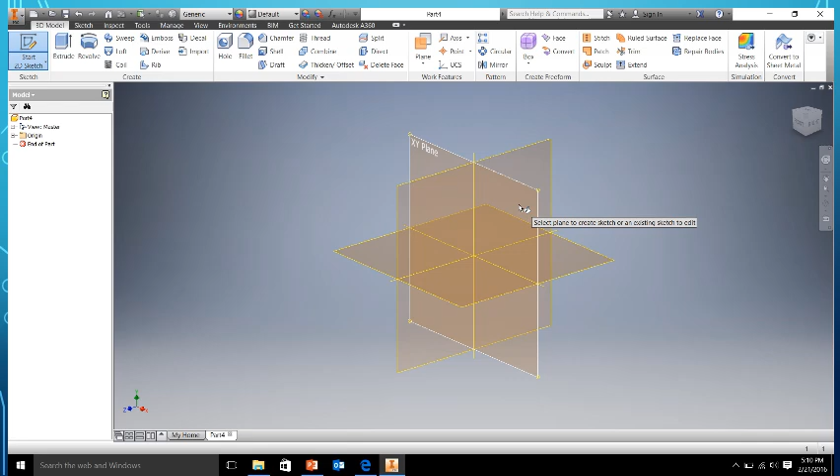First off, I'm going to go to Inventor, open a new part, start a new 2D sketch, go to Plane XY. I'm going to select the rectangle command. What we're going to do, we're going to make this rectangle 2 inches wide by 3.25 inches tall. Hit enter. I'll zoom out so you can see it. So our height is 3¼ inches tall. Our width is 2 inches.

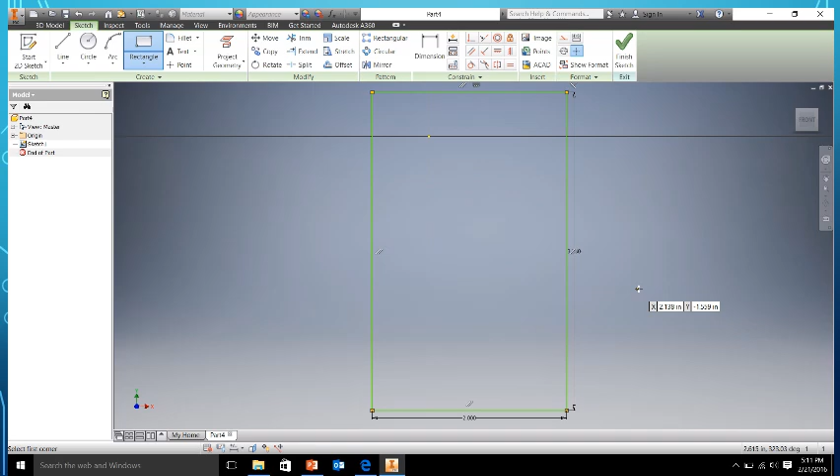This is going to give us the profile of the block, and we are using the subtraction method. I'm going to extrude this part. We're going to extrude this part to 1.5 inches. So 1.5 inches we extruded this block.

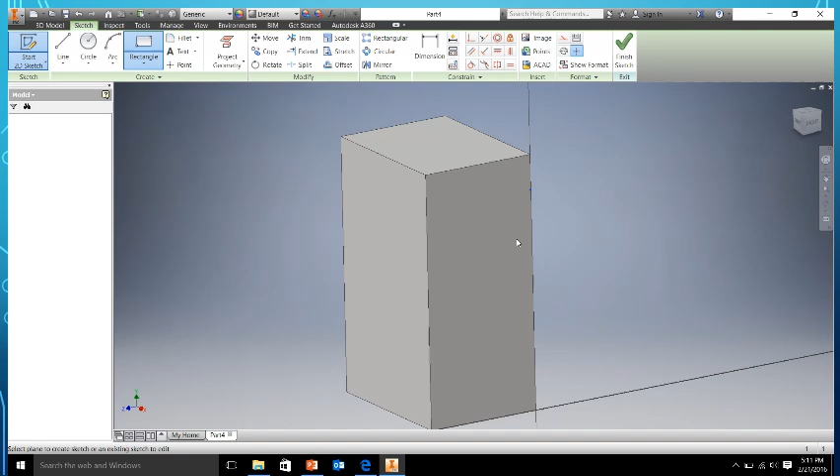Our next step, we're going to start a sketch on the right face, so the thinner face of our cube. I am now going to select the rectangle command, start up in the far left corner, make sure that little green dot shows up, or the bigger black dot. And what we're going to do is we're going to subtract this material.

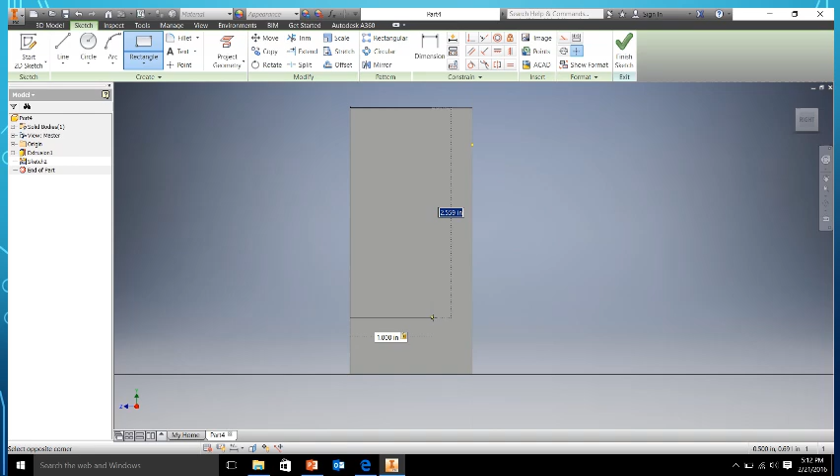So we're going to subtract 1 inch, so make your width 1, and our height is going to be, we're just going to type in 3.25, not divided by, subtract 0.5. That's going to give us our height of 2.75 and our width of 1 inch.

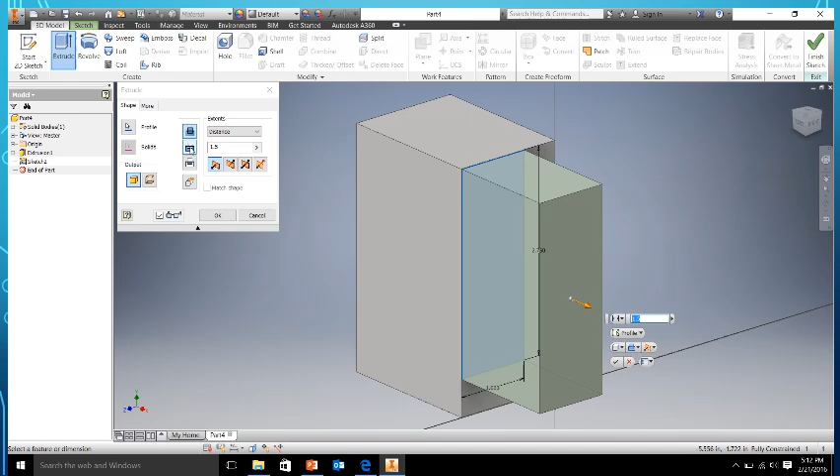The next step, we're going to extrude this block, but we're going to extrude cut. So it's the second option in your vertical commands here under extrude, and instead of distance, we're just going to go through all. So make sure that this whole box is purple and we get all of our material removed. We're going to hit OK.

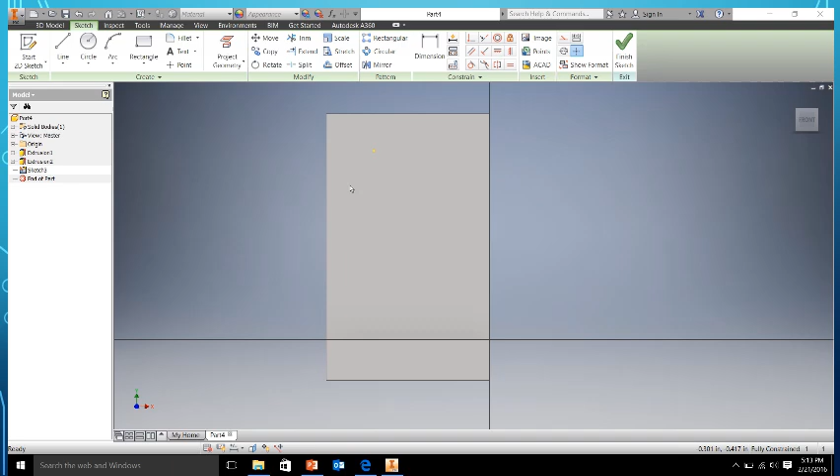Our next step will be to create a 2D sketch on our front face. After we start our new 2D sketch on our front face, what we're going to do is click the rectangle command. We're going to start from the upper left hand corner. Make sure you see that green dot or the larger black one.

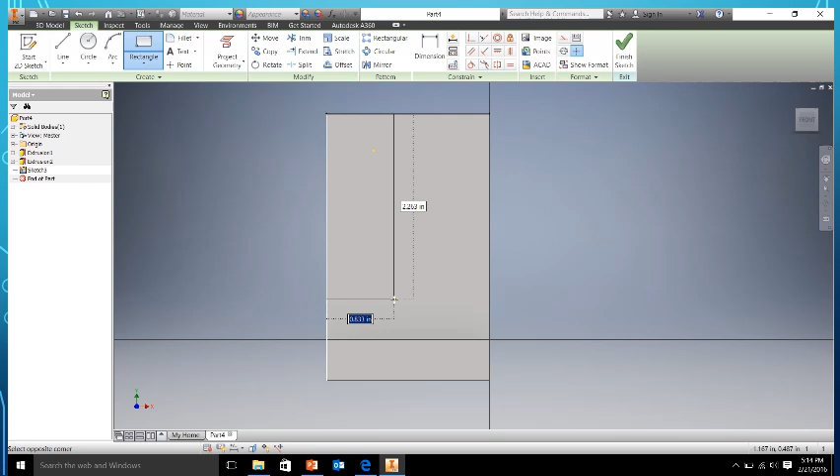What we're going to do is we're going to take off 1/2 inch. So our width at the bottom that's lit up blue, we're going to change that to 0.5. We're going to hit tab. Our height is going to be the 2.75. Go ahead and hit enter.

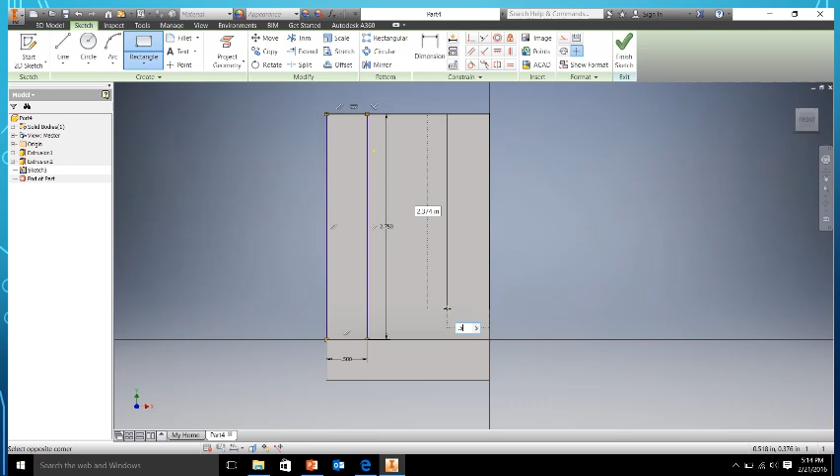Our next step, we're going to stay in the rectangle command and start from our right side. So it's going to be the exact same dimensions. Our width is 0.5, our height is 2.75, and go ahead and hit enter. So you have 2 of these rectangles on the outside.

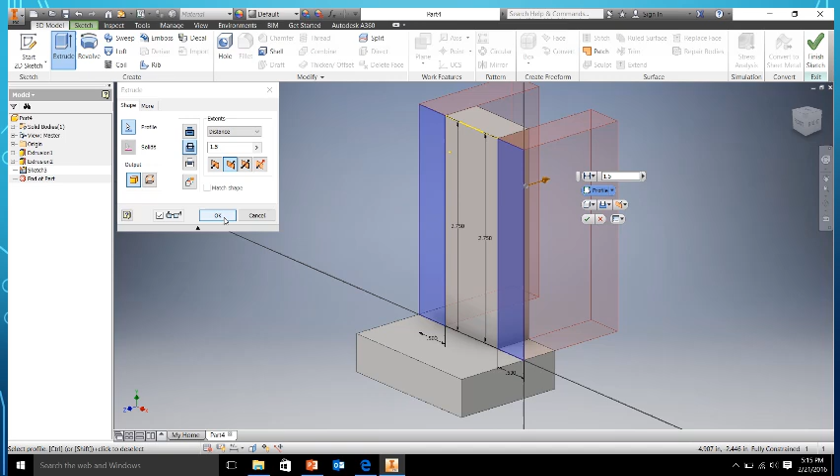Our next step will be to extrude those, but we're going to extrude cut. So make sure you have your cut selected. And what happens is we need to select the profiles. So we're going to go ahead and click those 2 rectangles on the outside. In this case, the distance of 1.5 will get all the way through our part, which is what we want. We'll hit OK.

Our next step, we're going to start a 2D sketch again on our front face of this long rectangle. Okay, our next step after we've created a sketch again on our front face, our long rectangle, we're going to hit construction line under format on the upper right by the finished sketch. We're going to select Project Geometry and click our front face of our long rectangle.

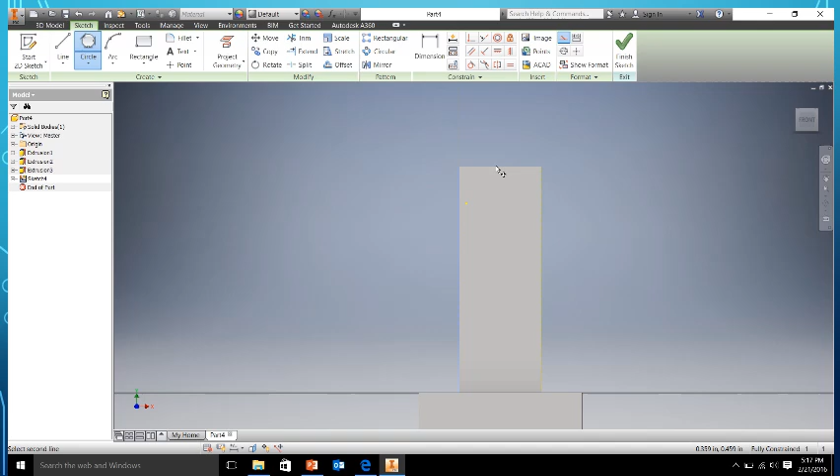Our next step is to take off Construction Line. We're going to go under Circle and hit the little triangle under Circle so we can have more options. We're going to select Tangent to 3 lines. From that, we're going to select our vertical line, our horizontal top line, and our other side vertical line, and it's going to give us a circle in the middle here.

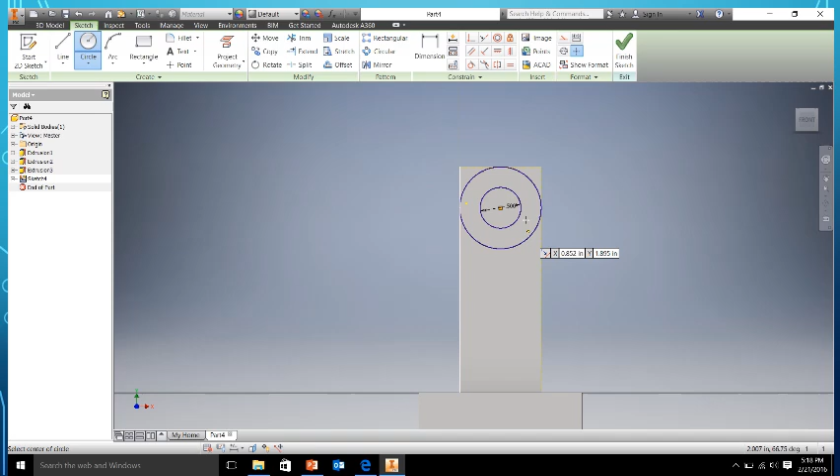After we have this circle, we're going to go back up to our circle command, hit the little triangle, and we're going to go circle center point. So just our normal circle. Click the center point of the circle we've just made, and our second diameter is going to be 0.5. So you see that we have 2 circles on the front face of our long rectangle.

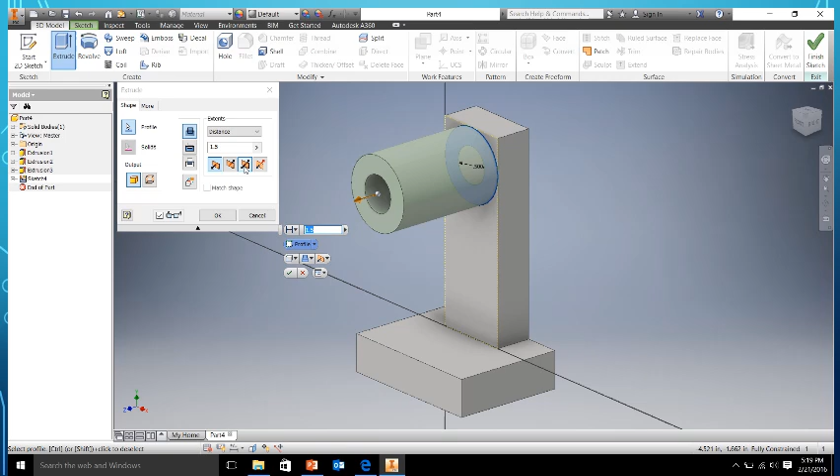Okay, our next step after we've created our second circle, we're going to go up to Extrude, and we're going to extrude in between our larger circle and our 0.5 circle. So notice there's a hole in the middle here. You're going to select your symmetric option. So what that's doing is it's splitting our circle on both sides of this face.

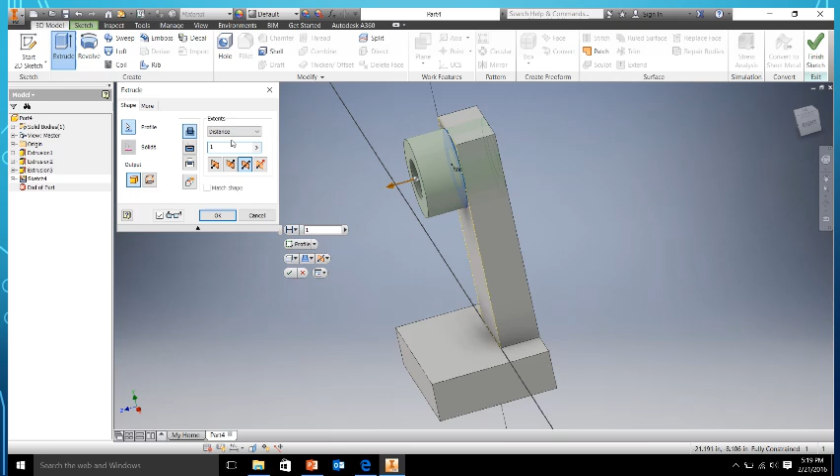And we're going to change our distance, instead of 1.5 inches, we're going to make it 1 inch. And you can hit OK. So, it didn't do much to the back side because obviously there's already a piece of material there, but it did bring it out 1/2 inch, which is what we want.

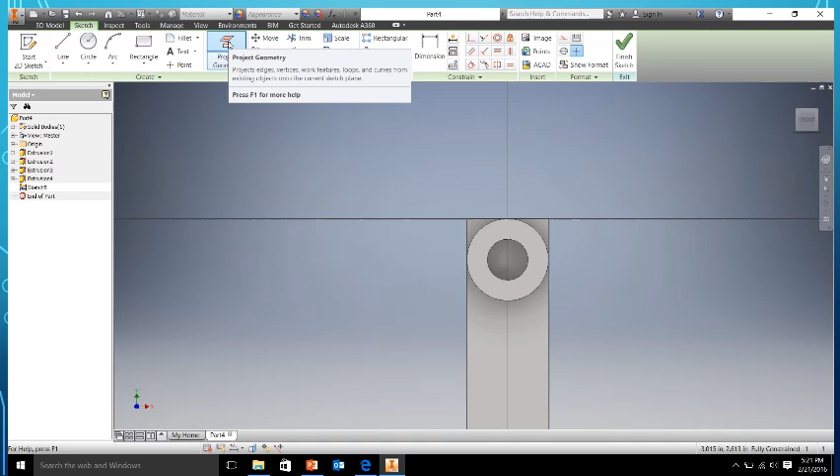Alright, after we've extruded our circle symmetric 1 inch, we're going to start a new sketch, and we're going to click the little triangle piece, if you will, up next to our circles. From that point, you're going to select Project Geometry and grab those 2 triangles on each side of our circle. Once you've done this, you will then go to Extrude, and we're going to cut.

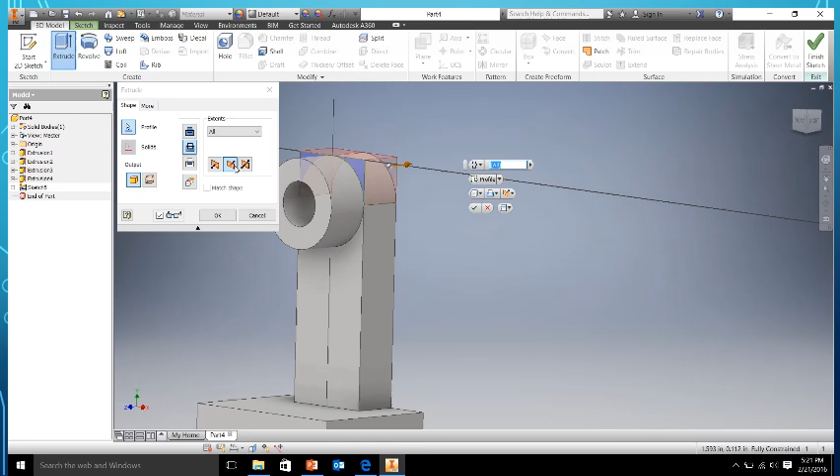And you do need to select your 2 profiles. So we're going to click those 2 corner pieces. And as long as it's all the way through our piece, in this case it's distance, we can also just click all, and it'll just make sure to get around those little pieces. You're going to hit OK. So far we're looking pretty good.

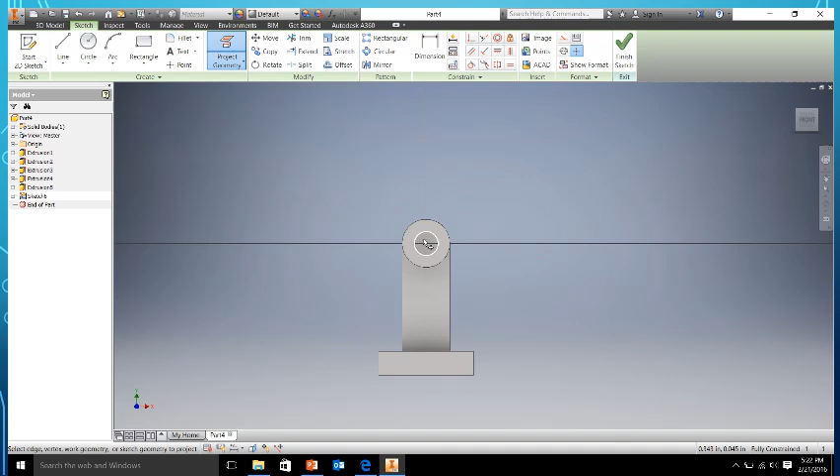What we need to complete, we need to punch out a circle in here. So I'm going to go up to Start Sketch, click the inner circle, we're going to click Project Geometry, select that so it lights up yellow, pink, whatever color you want. We'll go back to Extrude, and instead of extruding out, we're going to cut, change our distance to all, hit OK, and there you go. We have our circle in the middle.

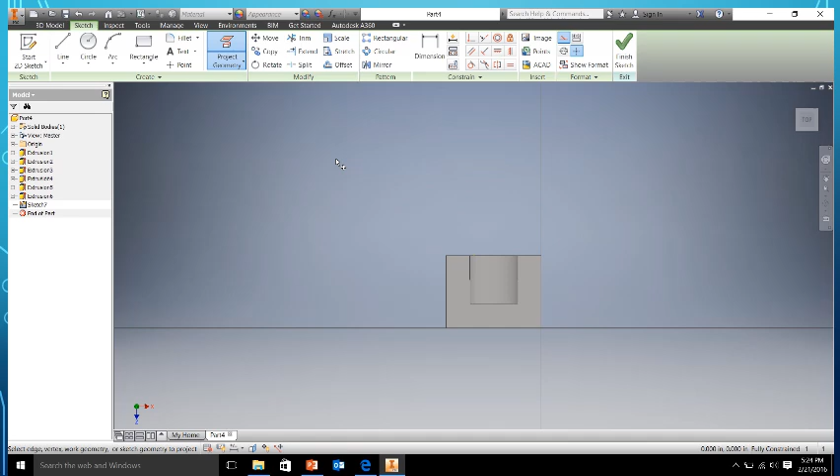Our next step in our process, I'm going to start a 2D sketch, click the top face of our base. From here, we're going to turn on our construction line under Format, go to Project Geometry, we're going to project this base, and also the very front of our circle. So you see there are the front of our line of our circle and our base. We're going to hit Finish Sketch.

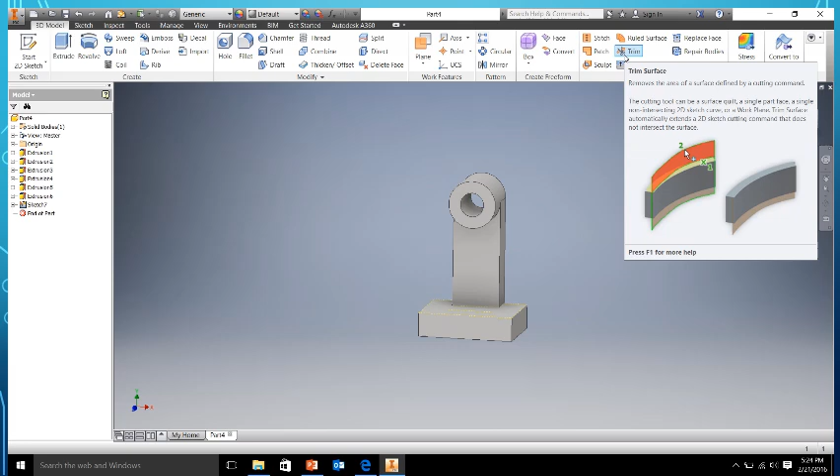Excuse me. We're going to hit Undo. So we're going to still be in our sketch that we just created. We just projected this bottom plate. We've just projected the front side of our circle. Next, we're going to go down to our bottom and hit Slice Graphics. Now, we're going to select Point under Create and put a point on each side of our line. So make sure they turn green or they turn to that larger black bubble.

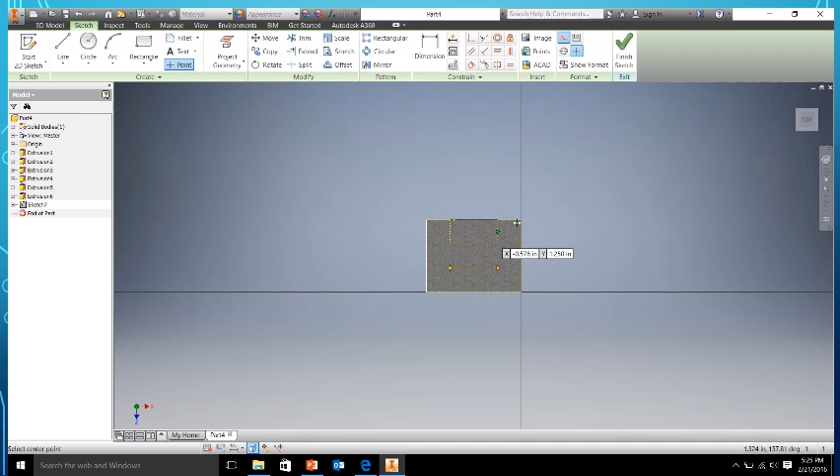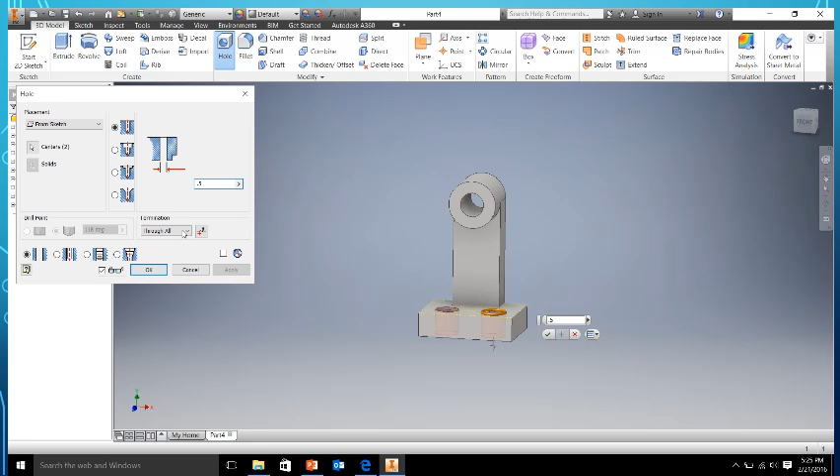Now we can hit Finish Sketch. We're going to click the Hole command, and as you can see, it selected the 2 points that we have. We need to change the 0.25 to 0.5. So they're going to be 1/2 inch. We'll hit OK. So now we have those 2 circles and our circle in the back.

Our next step being, we're going to hit the Fillet tool. Open up the little drop down. We're going to select this edge and our other vertical edge. Alright, we're going to change the 0.125 to 0.25. We'll click OK, apply, whatever you want to. So we have our 2 fillets.

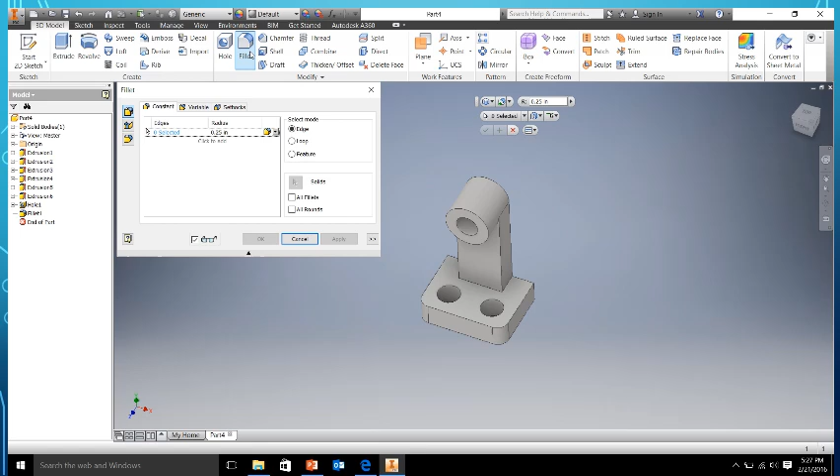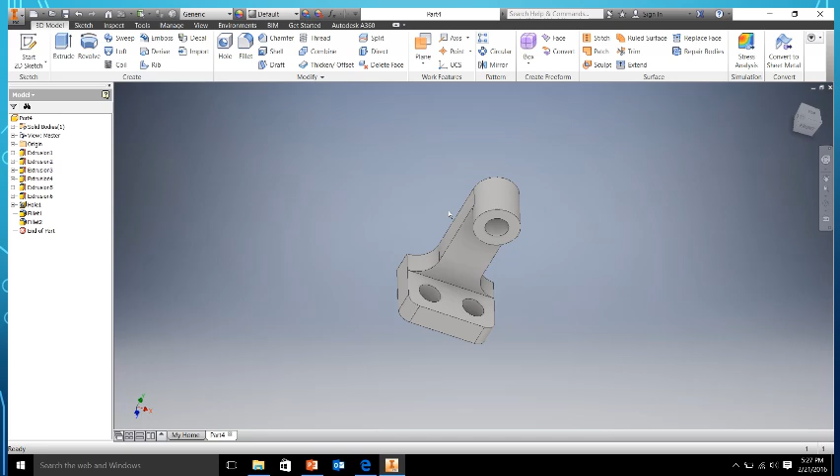And our last step, we're going to click Fillet again. We're going to click the inside, our bottom line here on our vertical piece and change that to 0.5. And you can hit OK or apply or enter should work. And there you are. We have part number 5.

Go ahead and make sure you save it. So File, Save As. I'm going to change this to part 5. I'm going to hit Save. And we should be good to go. Remember, you're going to have to dimension these and turn them into the LMS